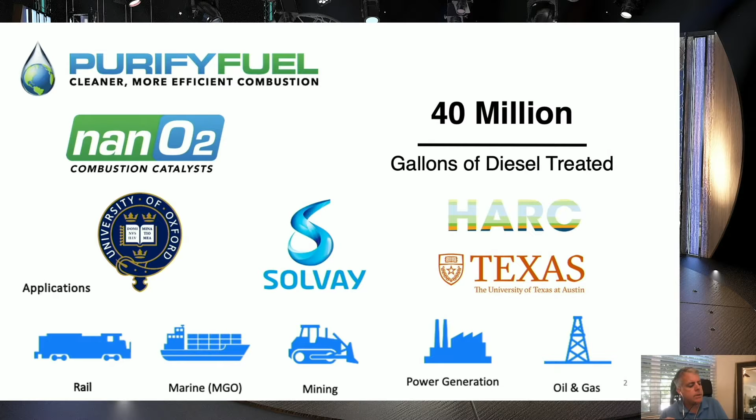And to that end, we worked with the Houston Advanced Research Center and the University of Texas to actually refine this product further. And we got a patent out of it, and it's working very well for us. Next slide, please.

We're just going to take you through a brief agenda. The three of us will take different parts of it, but essentially discussing the problem statement, cleaning up the diesel, and how this product works doing that. I'm going to share some data and some results that are pretty surprising. A review of the benefits in terms that our marine customers can actually understand, and then what our rollout is into the ocean and inland markets. Next slide, then.

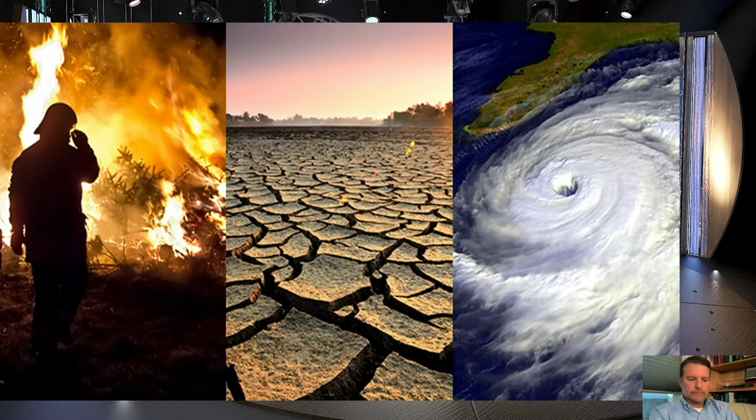So the problem statement is pretty simple. It's all about climate change and what we can do to try to delay it and what we can do to try to reduce the impact that fossil fuels have on this change. Next slide, please. There's two primary culprits to climate change in the fossil fuel part of the equation, one of them being coal and one of them being diesel fuel. We have opted to focus on diesel.

And the reason why we have focused on diesel is because diesel's demand does not decrease for the next 20 years. Part of that is because there's no true replacement for diesel. It's the lightest, most efficient form of energy. The other part of that is because the diesel engines last so long. So you're seeing here, we just installed this on a mining work truck last week that was actually built in 1982. It'll be 40 years old in another year and a half. So, these engines last a long time, as you guys can attest to in ships.

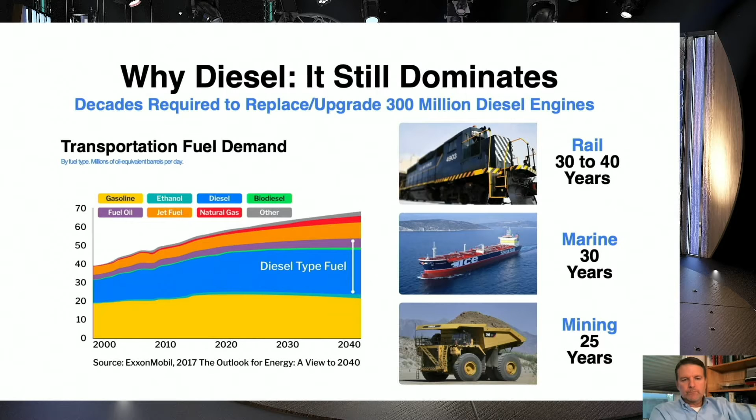And I was on a train working on a project, and the train was actually older than I was. And that's really scary because I'm not a young man. Next slide, please.

So we'd like to look at this, and we'd like to look at the challenges associated with the diesel fuel in lieu of this environmental, social, and governance model. So from an environmental standpoint, we're looking at what we can do to reduce greenhouse gases that will clean the air and help to cool the climate. From a social standpoint, we want to look at what we can do for the health and safety of not only the communities that we operate in, but also our employees that are working in and around the equipment.

And lastly, from a governance standpoint, we're looking at, can we make the business more efficient? Can we help it make more money? Can we come up with ways to make the business more sustainable? This environmental and social and governance model is not about tree hugging. It's a very serious thing. Next slide, please.

Because it's driving your access to capital with groups like Poseidon that are forcing you to file an ESG plan in order to get funding. And it was clearly highlighted by Maersk, who had to come up with a zero emissions by 2050 stance in order to recapitalize the company.

And then to add to this, not only is it just the access to capital, it's also going to be your access to customers with the new Sea Cargo Charter and similar initiatives, where the charter companies, before they charter your vessel, want to make sure that you have an environmental plan. Next slide, please.

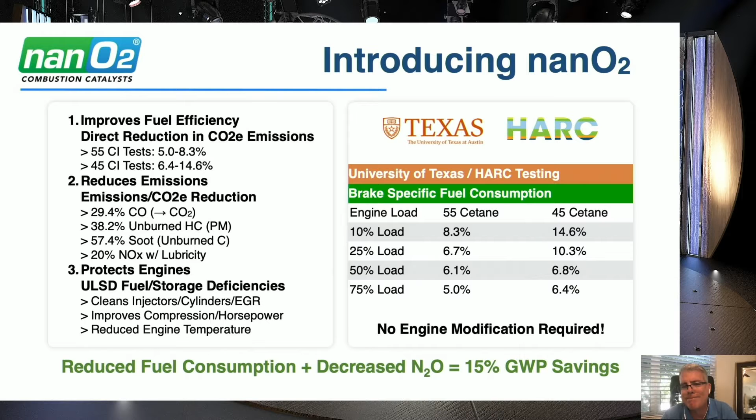So I'm going to turn this over now to Chairman Campbell to basically explain to you how this works, because it's beyond me. So, next slide, please.

So what I'm going to do is go through the science of how this works. And I know that there's probably some or many of you out there that are always skeptics around what you can do with fuel additives. None were bigger skeptics, as John mentioned, than I was. And so what I'm going to do is show you how this additive is put together, what it actually does in the engine, and what the impact of that is. So on to the next slide.

So our patented catalyst is a unique combination of some commonly available product as well as some special product, like John mentioned, from Solvay. One of the elements of the product is 2-EHN cetane improver. 2-EHN is probably the most popular cetane improver in the United States. It allows us to lower the required pressure to start ignition, which means we can initiate the burn in the combustion chamber sooner. And because it started a little bit sooner, it does somewhat reduce the exhaust temperatures. Reduction in exhaust temperatures, or peak cylinder temperatures especially, is important to reduce NOx.

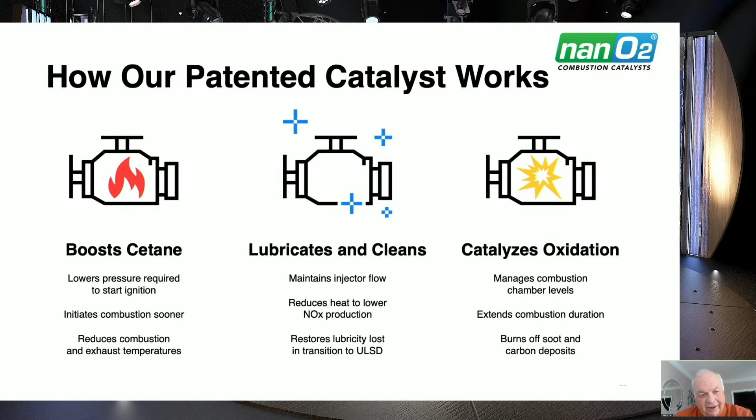This is a slide that engineers use to help explain what's going on in the combustion chamber by looking at it by each degree of crank rotation. So what you're looking at here is a map where the center black line reflects 0 degrees, or top dead center of the piston. To the left is what we call advanced activities. To the right is what comes after top dead center.

So just to orient you to the chart a little bit, the y-axis is the pressure. 50 bar on that is about 725 psi, just to give you some idea of what kind of pressures we're talking about. The x-axis down here is crank angle, as I mentioned, zero crank angle being top dead center. And this is some data that John mentioned from HARC at the University of Texas at Austin, where we did some testing.

We did testing on a Cummins ISB 6.7 liter engine, and the engine was well instrumented, so we could tell exactly what was going on in various parts of the engine. And of course, HARC is an independent nonprofit that helped us do this work to get this done.

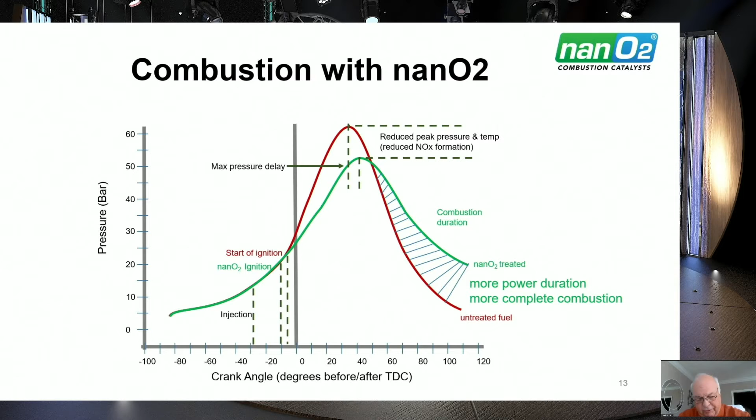And so what we end up with is a more complete process that allows this product to give you more power, lower fuel consumption, and at the same time reduce both particulate and NOx emissions. The next slide, I'd like to also emphasize that it's safe to implement.

There's no caustic or acidic material in this, but when you go and talk to engine manufacturers and say, can I use this? Almost every engine manufacturer will tell you that they don't want you to use fuel additives. Now they know fuel additives are being added. They're being added at the refinery. They're being added again when it comes out of the pipe and gets distributed. And they're added again by the individuals that are using the products.

So while engine manufacturers know that there are additives going into the product, they'll rarely or never approve them. The best you can get them to do is not object to them. And the reason for that is there's no benefit to an engine manufacturer to approve a fuel additive, and fuel additives are something that they have to have.

They wanted to measure all of them. It'd take a significant amount of effort and resource if they wanted to try to do that. Well, rather than say they're going to approve a fuel additive, what they do is ask us to be compliant with the product that we add to the fuel specs.

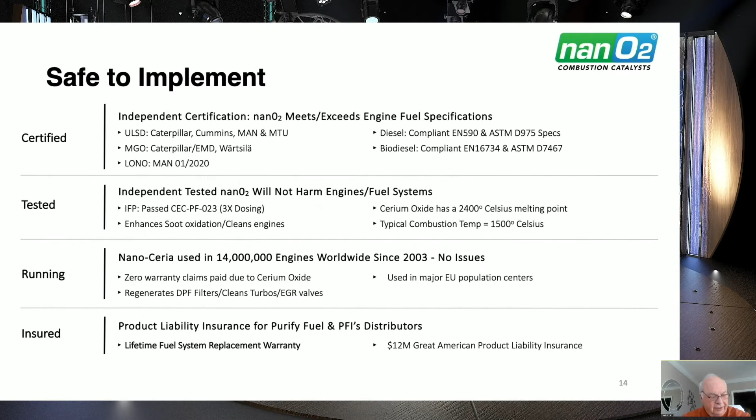And it has been used in major European population centers such as London. So it's a product that's safe to use, it works, it's safe to implement, and I just went through how it works. So let's go on to the next slide. I think I'll turn it back to John.

Yeah, I'll kick us off here. John Carroll, you're on mute.

So let's talk about testing. And thank you, John Campbell, for that. We're going to prove now how the catalyst reaction works and the outcomes that we've experienced. Next slide, please. So we've got two independent tests listed here. One involving a smaller 4-stroke 6.7 liter Cummins engine. That test John referred to as the HARC study at Austin, Texas, University of Austin.

Sorry, UT Austin. I better get that right in case anybody in the crowd went there.

And then the larger 2-stroke EMD 3000 horsepower engine that was tested down in Louisiana. That test was run by NRE Power Systems on their dynamometer. So we'll come back to these results, but the important distinctions are that there's similarity in these fuel efficiency gains under different engine loads that you see up top there. That's the upper table. And the emissions gains, which are spelled out in the lower table.

You see the similarities, even though these engines are pretty far apart on the spectrum, 4-stroke versus 2, 6.7 liter, probably 500 horsepower against a 3000. So again, we'll come back to these, but let's first talk about how we test for proof of our performance. Next slide, please.

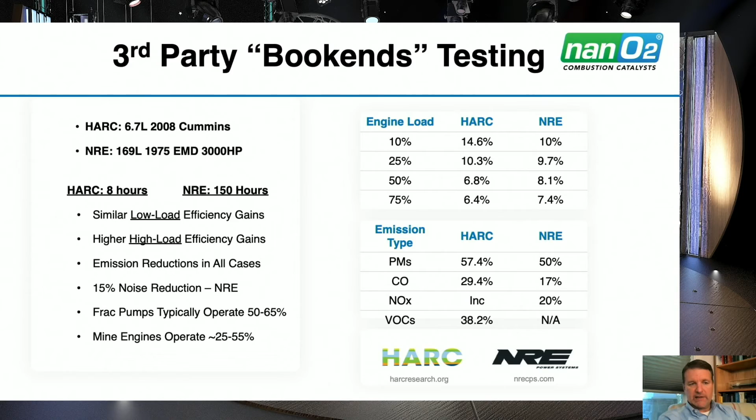So between the engine and the work we get out of it, there's different power losses that could be experienced. Some call them parasitic loads. In the case of marine, you've got wind, current, tide, bottom condition, propeller condition. You've got all kinds of things that would have an impact on your performance that could get penalized against your fuel or wrongfully benefit your fuel burn where that's not actually happening.

So our approach is to measure the power at the engine against the exact fuel used to generate that power, regardless of how it's used. In the marine case, we install a strain gauge to measure kilowatts or horsepower in frequent intervals with the data being captured. And then we match that up with our fuel flow sensors, netting out supply and return lines, as you know, diesels have. And then on top of that, we measure either spot or continuously the emissions in terms of oxides of nitrogen, carbon monoxide, particulate matter, opacity, et cetera.

So here's a quick look at how we evolved in testing our locomotive customers.

Unless, John, you want to jump in on anything there? You're on mute. No, I will jump in if needed, but you're doing great. Okay, good. Thank you.

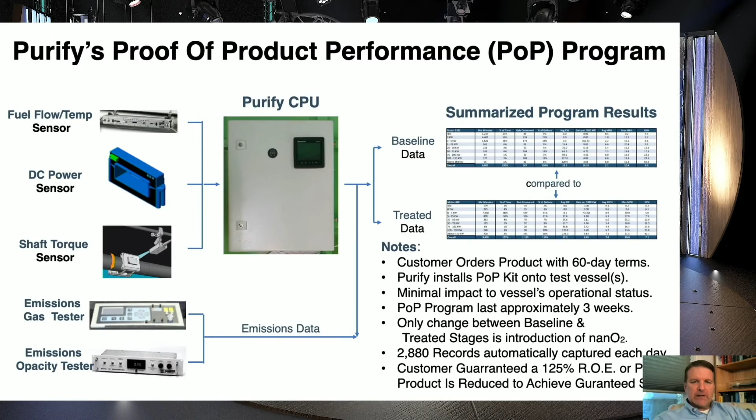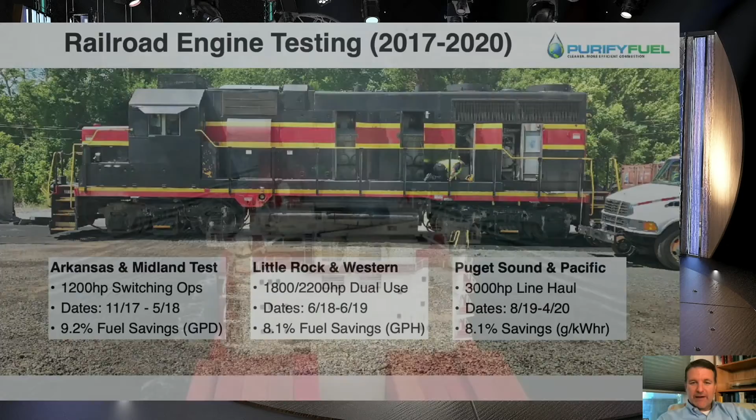So let's take a look at a marine engine test. This will be a 3,000 horsepower tugboat engine that was tested at NRE down in Houma, Louisiana. This is a video produced from the testing process with some commentary from the lead mechanical officer at NRE that ran the test. So hopefully you can get us the next slide, and that should be the video. We'll watch it. There we go.

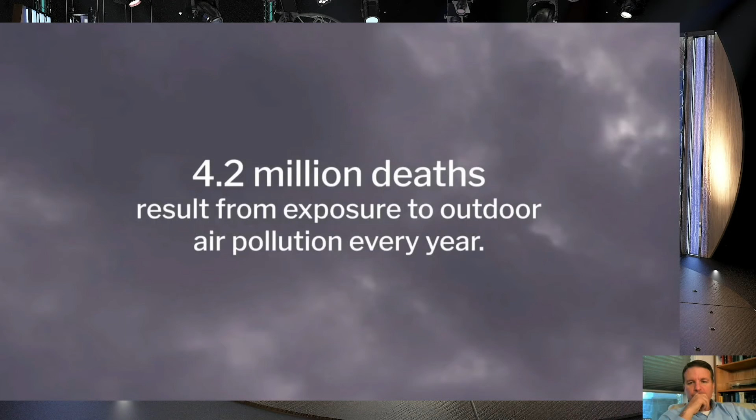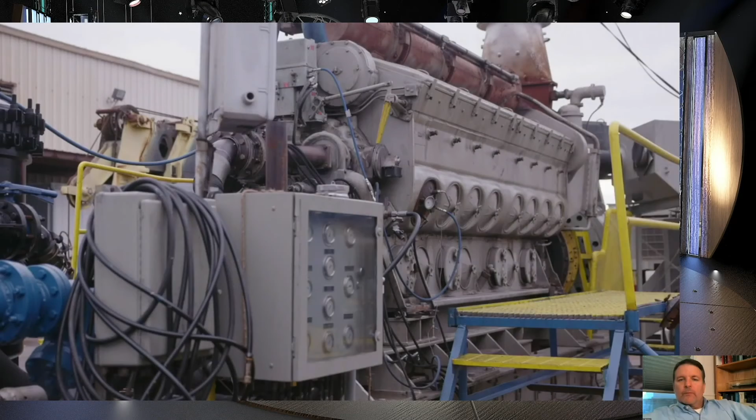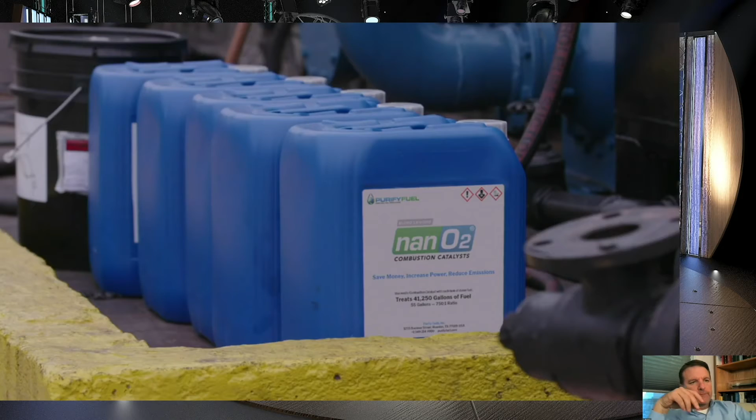Peter Leday, I'm senior technician and I work for NRE Power Systems. NRE is a full service provider with parts and service for marine, rail, and power generation. I have 43 years of mechanical experience. I've worked in emissions, research and development, running repairs, field service. I've done extensive testing in additives, emissions, and our emission certificates with the EPA. Today we're running a test on Purify Fuel nanO2 additive catalyst product. I've tested a lot of products in the past. I was very skeptical. Most products are what we would call snake oil and never meet the expectations.

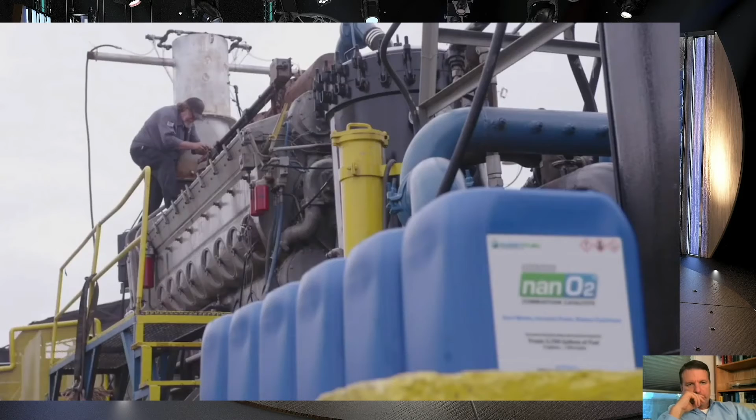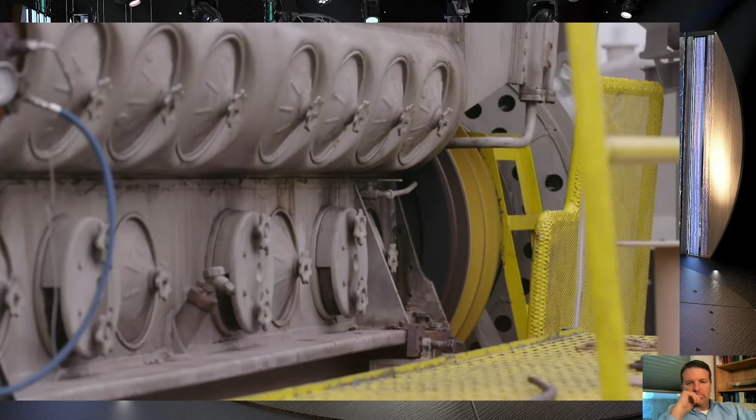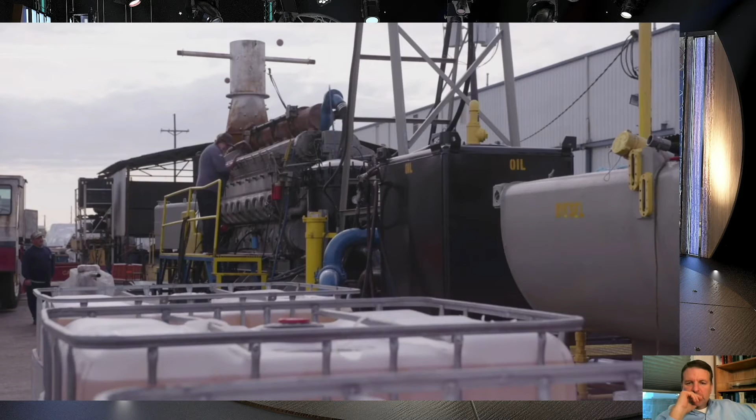The engine being tested today was pulled out of a vessel a few months back and was built in 1975. The data we are collecting is horsepower, fuel consumption, emissions being NOx, CO, SO2, and any other EPA-related pollutants. We ran the engine for about 150 hours at various RPMs and various loads. The primary challenge with reducing emissions and fuel usage is if the carbon monoxide increases, the NOx decreases, and vice versa. It is very difficult to get both to meet emissions. With nanO2, we have seen a decrease in both, which is very impressive. I have never tested anything that lowered both at the same time.

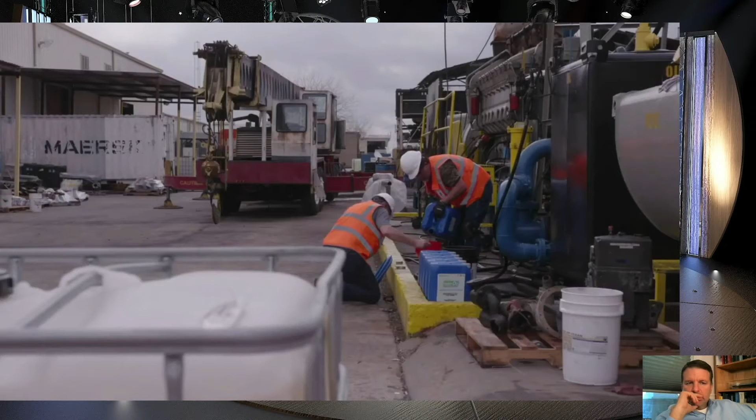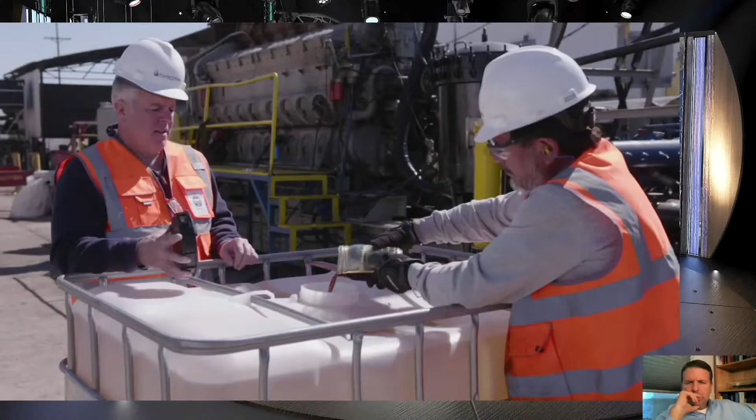Fuel consumption was decreased, pollutants were decreased, opacity was decreased, which is the smoke coming out the engine, directly correlated to particulate matter. When we added the additive, the engine had a more crisp, powerful sound. The overall performance of the engine increased dramatically. In my 43 years, I've tested a lot of products. I have never seen or even heard of a product that would perform this way. None of them compared to Nano 2. Everyone is looking for a better planet, and Nano 2 Purify Fuel reduces emissions, reduces fuel consumption, increases engine performance, and is very impressive.

Okay, next slide, if you would. So the results that NRE was referring to were in a brief snapshot in the video that you couldn't really see, so we're showing them here. These are in terms of fuel consumption reduction, emissions reduction, and the other noted outcomes. I'll just repeat one thing Mr. Leday said he was most surprised about: the actual reduction of carbon monoxide at the same time as a reduction in NOx. Typically, those are interchangeable.

You get one, the other one goes up; you get the other one, and the first one goes up instead. This was a simultaneous reduction in both carbon monoxide, which is an indirect greenhouse gas, and oxides of nitrogen, which are very direct greenhouse gases. In fact, one of them is a really bad actor. So anyway, these are the results that came out of it.

The engine fuel efficiency gain was depending upon the load factor. The soot, it was notable. In fact, John Carroll, who's on this presentation, was actually there during the test over 12 days. And it was notable, the soot reduction, and even the noise reduction, even a lower noise.

Go ahead. No, and I thought the other thing that was pretty incredible is we had an engine that was doing almost exactly 3,000 horsepower at notch 8. And after adding the product and letting it double dose for a couple of days, it was doing 3,250 horsepower, right? And so that increase in power just goes to show what John Carroll was saying: a greater percentage of the fuel is being burnt during the actual power stroke, which is driving that gain in power. And to top that off with the lower heat is pretty impressive.

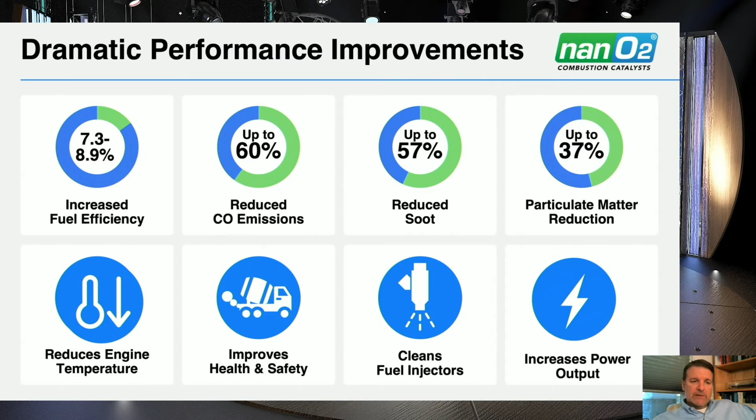Let's go to the next slide. John Carroll is going to talk us through some of the benefits a little bit. Here we go. Next slide. Next slide. There we go. So from an ROE standpoint, and I'm going to try to make this slide a little bit bigger because I can't really see it very well. No, that doesn't do it, John. All right. Just click on the window, the slide window. Oh, really? There you go. Yeah. Does that work? No. Anyway, I think I recall this one.

So on this benefit, on the average of 8.1% fuel savings, we sell our product in either 55-gallon drums or 275-gallon totes. On the drum side, we basically cost around $3,000 per drum, but we treat 41,250 gallons of fuel at a fuel cost right now of $1.50 a gallon, so for every $3,000 you pay for our product, you save $5,000 in fuel. Same thing on the tote. For every $15,000 that you spend on a tote, you're going to save $25,000, right? So there's savings truly out the gate.

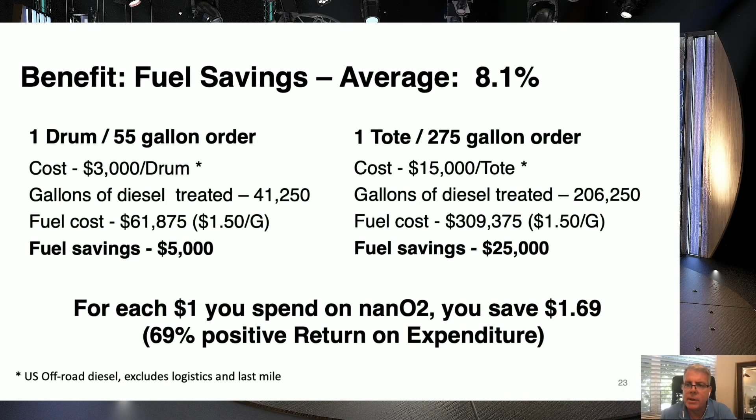That's why we call it return on expenditure and not return on investment, because there's no upfront engine modification or upfront costs that you have to pay. You simply splash blend it with your fuel, and it works. Next slide, please.

This increased power thing, I think, is explained best in fracking. And fracking was our first customer and our biggest customer. When we first went in there, in the bottom middle area there, you're going to see a test that was done in a lab, and it looks at the same power levels with our product and without it, and it looks at the improvements. And overall, based upon the weighting of it, we expected to save them about 6.2% in fuel.

This did not surprise us being a little bit lower, because these fracking pumps operate at such a high load, right? They're at 85% load. But if you look at the bottom left-hand chart, what happened was their internal audit group went back there and did an audit of the actual fuel bills and an audit of the ECU to see what was going on inside the engine during that time frame.

So after 250,000 hours of operation, they discovered that the additional power that was being generated by the engines allowed the pumps to actually work at a more efficient gear setting.

That actually increased their savings to somewhere between 8.2 and 8.7. And we even have additional data since this study that is just being done now, where they claim that they're actually receiving, if you look at it in terms of 100,000 hydraulic horsepower hours produced, that they're actually saving 9.3%.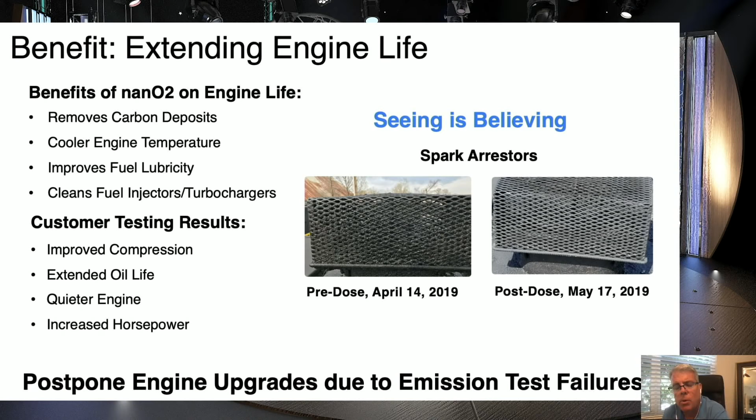Right. So I just want to make a comment. You know, I've enjoyed this conference so far. I was able to catch a few sessions live, and then I had to go back and look at a couple of sessions on the video replay, which I'm glad that we have.

But one thing that kept coming back is this theme on ESG and sustainability. So I thought it was important that we take this discussion about nanO2 and the technology and the results and put some of this in terms that are addressable to the challenges that our companies have today. Ship owners, ship operators, charterers, the whole community that's here at this conference. And that comes down to ESG and sustainability. So let's jump into the next slide. I'll show you where we're going with that.

So we know that nanO2 supports any and all sustainability requirements of the marine market in basically three ways. The direct environmental benefit with the reduced emissions that John talked about, the community benefit and cleaner exhaust, which are directly linked to human health. There's all kinds of chapter and verse written about, especially the oxides of nitrogen and the particulate matter, depending upon the size of the particulate, a direct impact on human health, human lungs.

The maritime industry has already taken a big jump this year, as you know, with the reduction of sulfur, which creates sulfur dioxide, which is another human health hazard. But we're still open here, and we've got to address the NOx and the particulate.

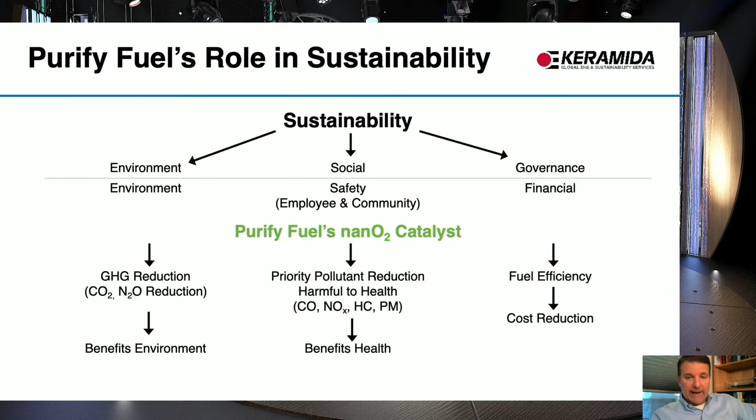And then the third one, really a corporate benefit in cost reduction through energy savings alone. Without the degradation of workplace and job loss and offshoring and all these other things that we read about, this is an example of where you get energy savings that supports good corporate governance without the downsides. It's a very powerful sustainability support for what corporations are being asked to do today, and we support all three. Next slide.

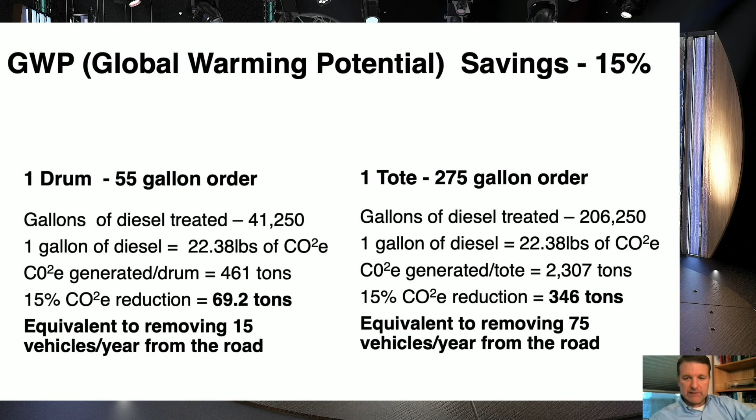Next slide, please. So all companies today are being asked to look at their carbon impact in different ways, or scopes as they're termed. We all have a scope 1 concern on what we do for a business, and we're all a scope 2 or 3 for someone else, depending upon how we're being utilized by our customers. So by reducing carbon emissions in marine engines, we're not only helping our customers, but we're helping their customers as well in this total framework of carbon intensity. So when you hear about scope 1, 2, and 3, that's becoming a pretty common discussion right now.

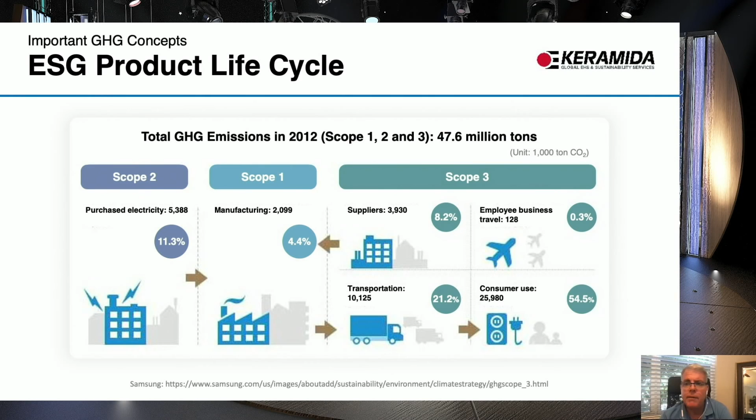This has impact on the entire chain, especially as we go into power generation with nanO2, which we are, by the way. What's interesting about this too is I've been asked by a number of our customers to go out and visit with their customers. So scope 3, if you are a shipping company or a rail company, you are a scope 3 provider for your retailers. So I've gone to Kimberly Clark. Actually, next slide. That's our next slide here. Go ahead. I just want to make sure they see the scope 3 stuff there. There you go. Sorry. Okay.

So we've actually had the ability to go out there and talk with customers and show them this stuff and help them document it in such a way as to help them get a larger share of the business from their customers who have these initiatives, like Georgia Pacific. And it's very fun to go out there and use this whole greenhouse gas thing to help your customers get more business.

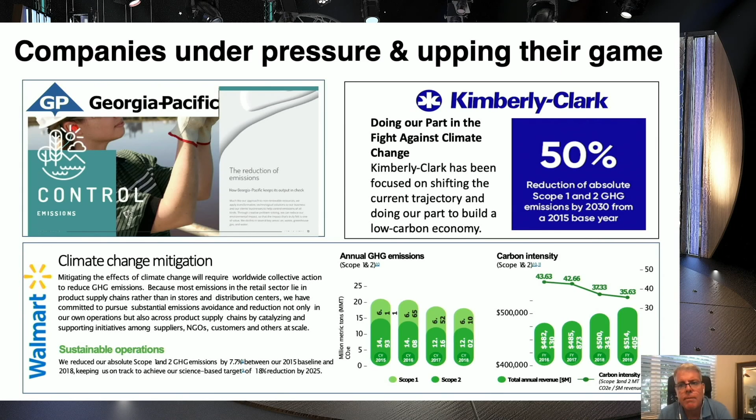Go ahead, next slide. John, why don't you grab this and then I'll take the one after to finish up marine.

Yeah, so I know we were all aware of what happened in the second quarter of this year when, for a while here, near Houston, the price of West Texas actually went to minus $37 a barrel. We went from roughly $2 to $2.10 for off-road diesel down to 67 cents. Fortunately for us, we have pegged the price of our raw materials to the price of crude oil. And so we were able, even at 70 cents, to reduce their price to ensure that they always got a return on expenditure.

So we always want to work with our customers. We always want them to do all 3 parts of ESG. We want their environmental to be better. We want their employees and their communities to be safer. And we always want our partners to make more money.

Next slide. Great. And I'll finish it up. We've been asked a couple of times in this conference and even prior to that as to exactly what is the plan in marine. You've heard about our exposure to rail. We've got over 300,000 engine hours in rail in a lot of different companies all over the country now. And those rail engines are very similar, if not in some cases identical, to tugboat engines.

But we've also got the fracking and drilling, the oil and gas exploration side of it, where we've got over a million engine hours now. And I think, John, you said 40 million gallons treated in that case. So coming into marine, our rollout plan kind of looks like this, where we've divided it off sort of by the engine type and size and the fuel being used.

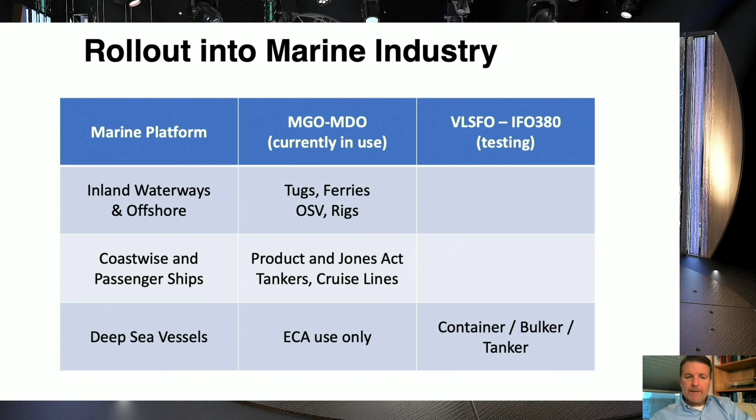That's kind of what it looks like. And that will be our process forward: marine gas oil and then VLSFO. I think that's pretty much it. Let's take the next slide, and we'll address any questions or go back and revisit any other points if we have any.

Okay, we're going to go ahead. I don't think we've got any. They said, yeah, go ahead and conclude it as we want.

We'd like to thank you so much from John Carroll and John Campbell and myself for welcoming us into Shipping Insight. We've had a lot of good feedback during the conference, a chance to meet some new folks and get some new ideas, but we are charging forward with this. We're very confident in our data. We're confident in the chemistry behind this additive, and we're very grateful to be part of a solution to a problem that is so prevalent and so widely discussed at even this conference.

So on behalf of John and myself, John, go ahead. Yeah, I'd be remiss if I didn't thank too. We have great distributors. We signed Mencast in Singapore. We signed the Kanoo Group in the Middle East. We're working on a direct office in Europe, and we're of course here now. But we have some great partners. We have some very aggressive plans, and so far it's been very enjoyable to work with so many of you.